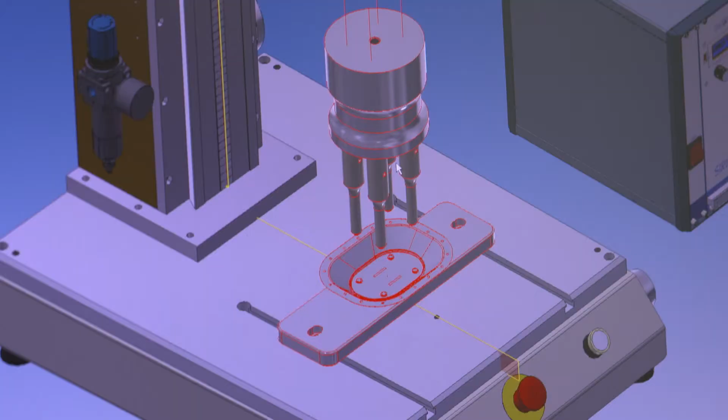Sirius Electric, for 30 years, has been creating systems for the welding of thermoplastic materials. Sirius Electric is a modern-day company projected into the future. It designs and creates welding installations in the Vigevano plant outside Milan.

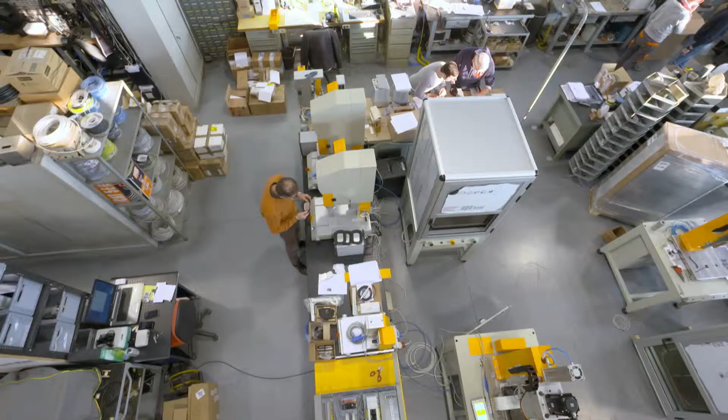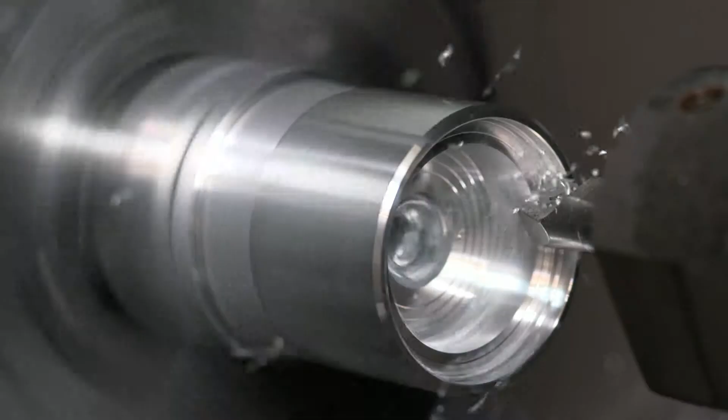But the system, the machine, is only the last part of a more complex path. A path that starts with an idea, a project which, with sophisticated CNC machines, takes shape inside the matter to then be guided by electronics.

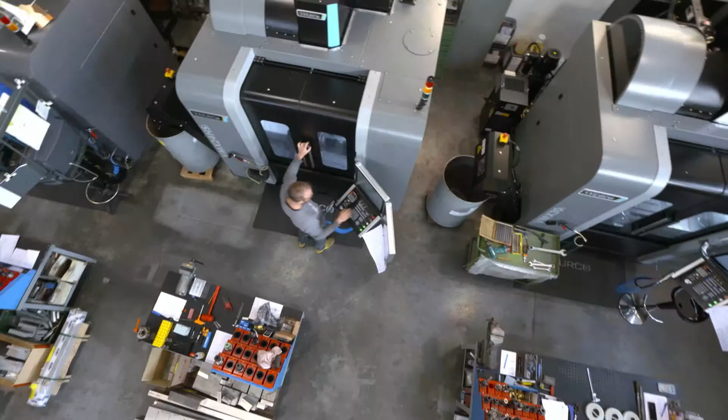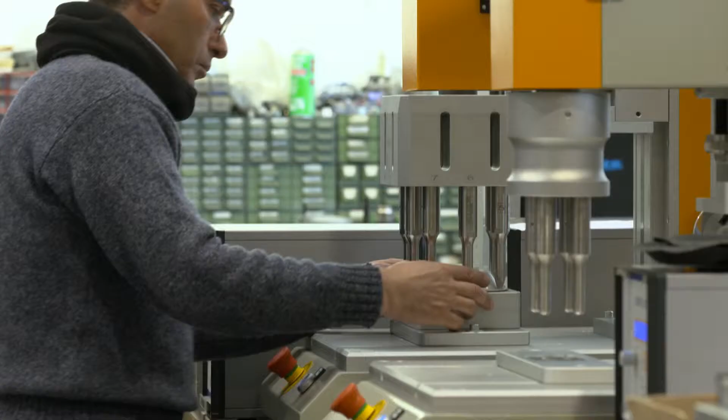Careful control of the entire production process, the creativity of its designers, combined with the ability to handle every phase of the processing, has created a virtuous circle. An idea that is repeated and has been evolving for 30 years, to invent and build every machine in its own factory.

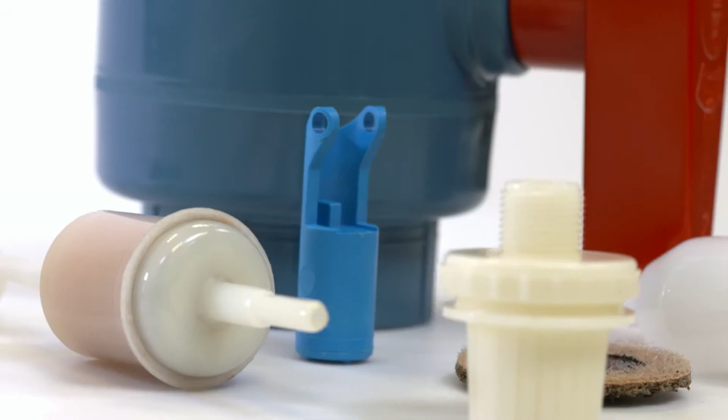A path of continuous improvement, the increasing expectations of clients, leaders in their industries, find continuous, positive answers. Sirius Electric finds, for every type of part, the highest performing and most profitable welding method. And after the sale, it follows the client at their factory in all technical support activities.

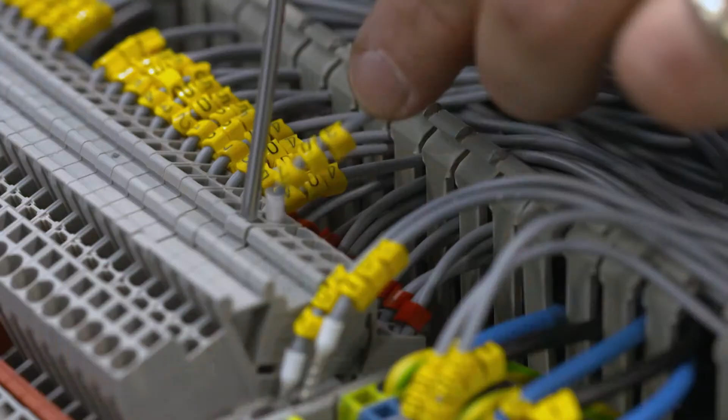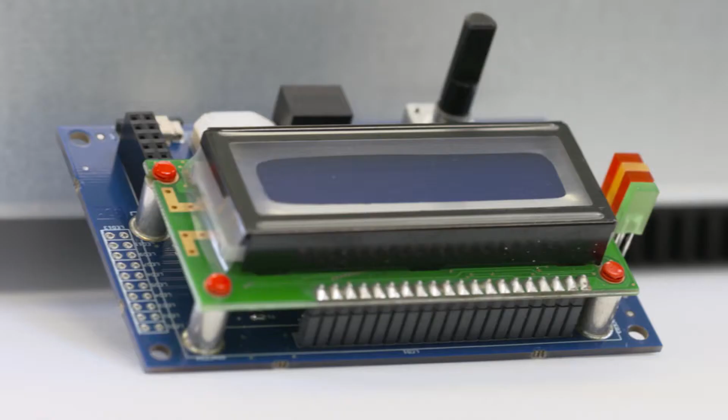There are 4 technologies that have been developed: ultrasonic welder, vibration welder, spin welder, and hot plate welder, each with different characteristics, advantages and purposes.

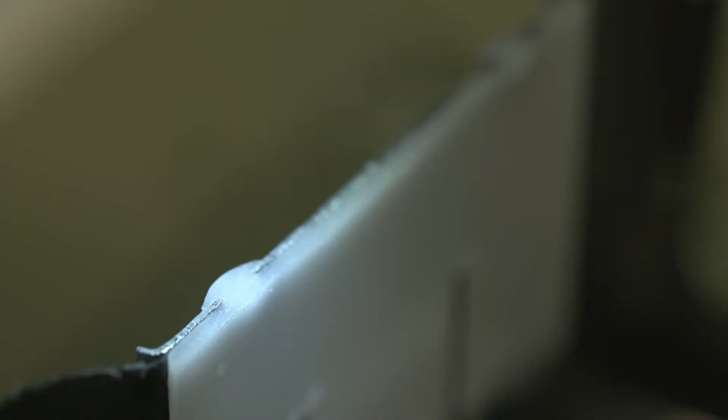And it is in fact during the analysis phase of the client's objectives that the Sirius Electric experience makes the difference. In fact, every time that it becomes necessary to assemble plastic objects, the Sirius Electric R&D department analyzes the project and the client's objectives.

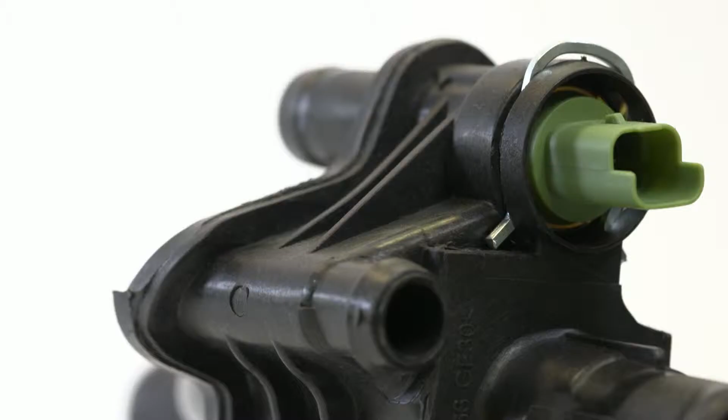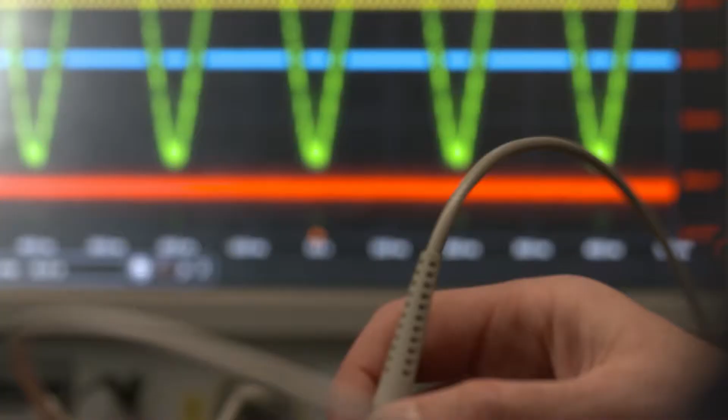First, by evaluating all the material, then the geometry of the model, and lastly, the productivity that is expected from the investment. The sale of welding machines, integrated with the sharing of the know-how with its contacts, makes the Sirius Electric project unique.

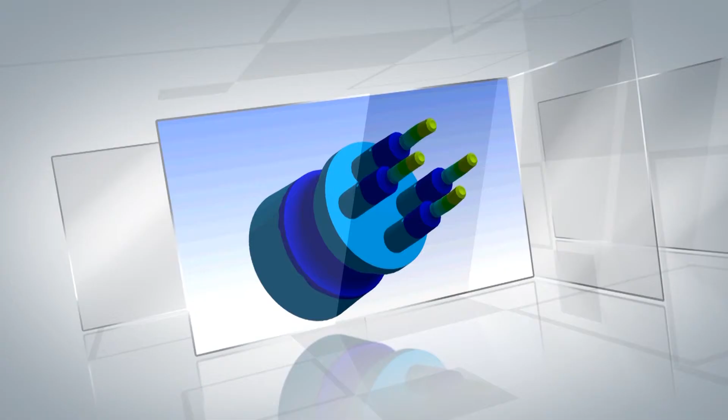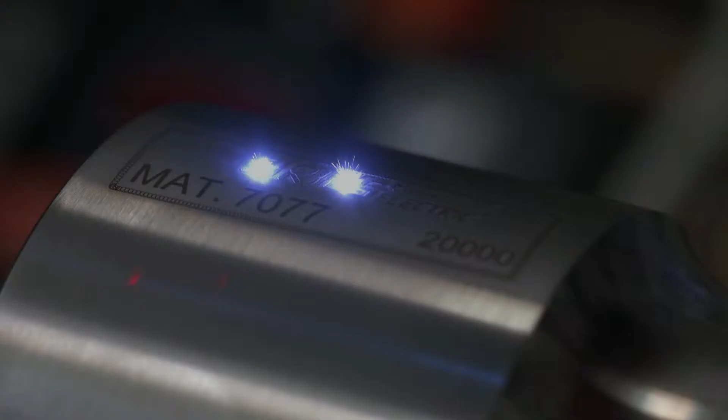The engineers start with the client's idea to arrive at the design of the welding joints and the selection of the best technology to be used. The mathematics of every piece is checked to understand which solution to adopt. Only then are the welding machine or the accessories intended to meet the expectations of the client designed and created.

The assembly of parts in thermoplastic material can be done with very different systems. There are about 14 possible technologies. Sirius Electric, during 30 years of business, has developed 4 different systems.

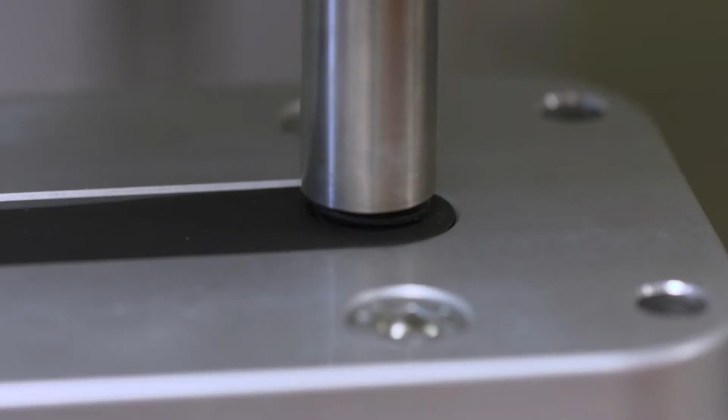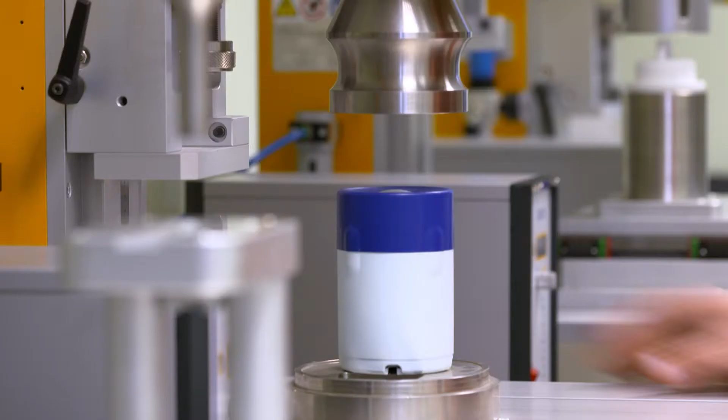Ultrasonic welding, manual or pneumatic, has great advantages. It is extremely quick, does not damage the material, eliminates screws and gluing, but requires rigid materials in forms that are not complex in order to ensure a constant propagation of the energy within the part. It is particularly suitable in the automotive, electronics, medical and packaging sectors.

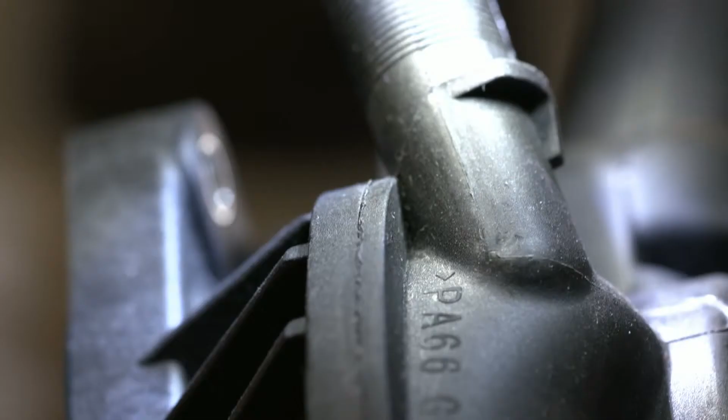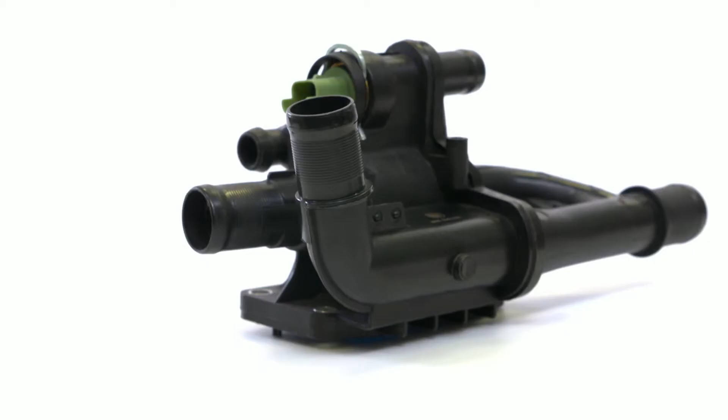Vibration welding makes it possible to join together almost all thermoplastic medium and large size materials. But the positioning phase of the elements is particularly critical. It requires more time and parts with high rigidity to be able to successfully transfer the energy.

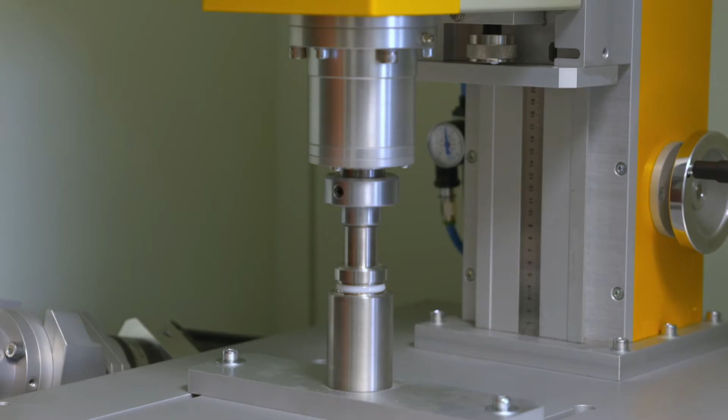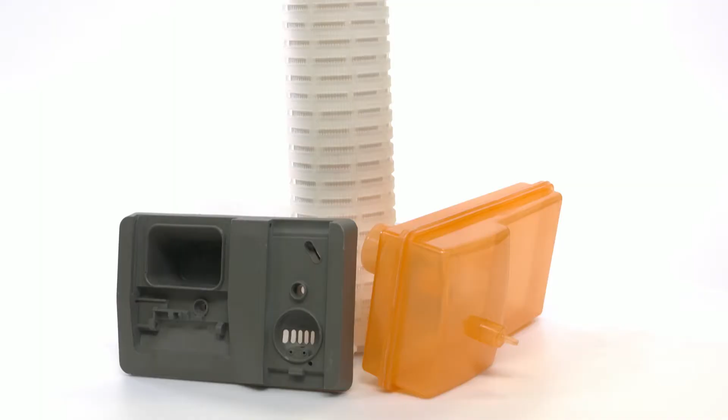Spin welding is the most flexible because it can be repeated, is economical, suitable for most plastic materials, but has significant restrictions in terms of the geometry of the parts. Hot plate welding is simple, economical, repeatable also on large parts, and has longer cycle times.

That is why Sirius Electric's experience becomes decisive. Not only the welding machines, but how to use them after having built them together.